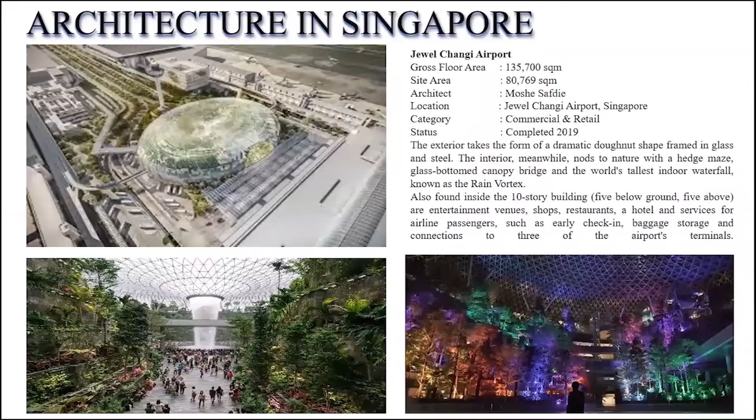This one is completed in 2019. They have airport facilities like baggage, early check-in, storage, and for people who want to go to transit and enter into Singapore, tour Singapore, they can have their baggage areas in the airport. This one actually has a connection with the other three terminals - it's one of the first terminals, connected with the other terminals also.

The second one is Interlace Condo. It's a residential condominium using parametric architecture, designed by Mr. Ole Scheeren. This is a complete residential condominium arranged in 8 different courtyards.

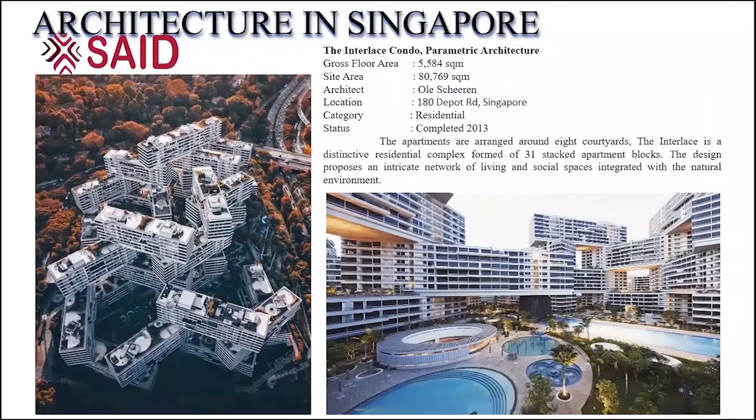The Interlace is distinctive as a residential complex formed from 31 stacked apartments. The design purpose is to create an intricate network of living and social spaces integrated with the natural environment. The parametric design elements together define, encode, and clarify the relationship between the design intent and the design response. This was completed in 2013.

Gardens by the Bay - another iconic building in Singapore, completed in 2012 itself. This is totally a place for tourism and recreation. Gardens by the Bay is full of structures and glass domes, with a beautiful waterfall inside. They have the largest garden in the bay, about 54 hectares, 130 acres.

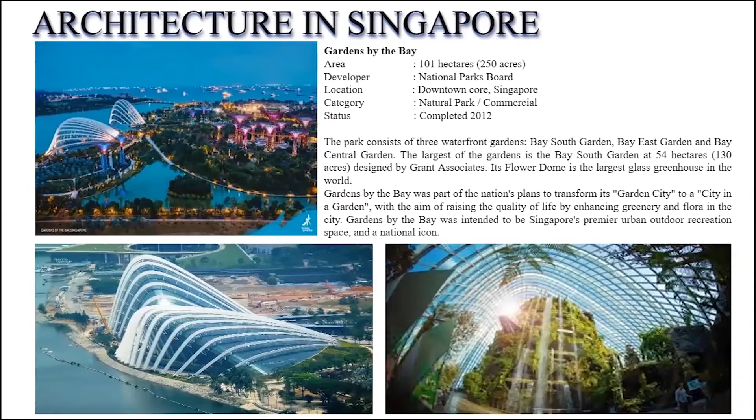It's also called a garden city, or city in the garden. It's full of all kinds of flowers and flower domes and everything over there. It's a beautiful, relaxing, and very interesting place to visit for tourists and also locals.

One of the interesting buildings is Marina Bay Sands. I think everybody would have seen it in the Singapore skyline. This one was completed in 2010. It's a 55-story hotel, and they have casinos, sky parks, roof terrace, and everything. It's a beautiful place to see and enjoy.

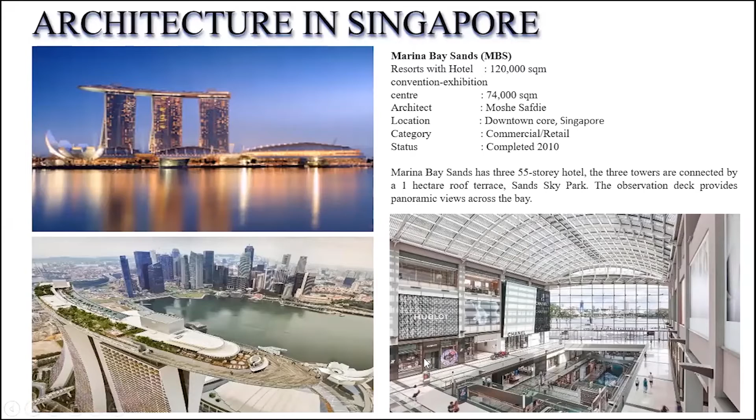Now this one also is like another building - there are two buildings, including the glass facade and also the Marina Bay Tower. You can see the same thing - look here, the same design. You can have replicate designs over here also.

This one has inspiration from sun, wind, and water and everything. You can have a look on that - it's showing that it's like a sail kind of design. This one has 70 stories, and it's one of Singapore's tallest condominiums.

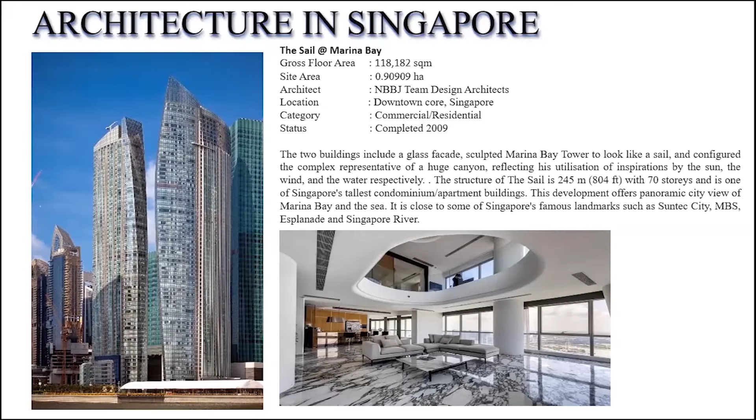So it's apartment buildings, and you have a panoramic view - city view, Marina Bay Sands, and sea view. It's also in the center of Singapore, so you have very easy access to Suntec City, MBS, Marina Bay Sands, Esplanade, and Singapore River.

This is one interesting building. I chose this building because of its winning design. Architects came and competed for the design, and finally this architect got the chance to design this building.

This is purely a commercial and residential building, but it's not something affordable for everybody, unlike other condominium buildings that give that condominium effect to normal people. This was designed by RSP Architects and also ARC Studio Architecture - these firms combined to make this design possible. This building has sky bridges and glass panels, and whatever you name it in a condominium, you have that same kind of facility inside. And they have bay windows, balconies, and everything.

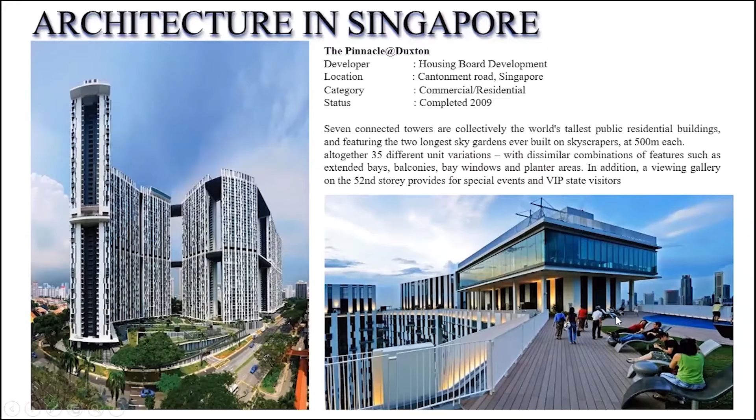So the next one is a government project. The other projects we discussed are all private projects, but this one is a government project.

Next, I would like to start with the Green Mark. Singapore came through this Green Mark scheme, which was launched in 2005, as an initiative by the Singapore construction industry. These are mostly environment-friendly buildings. It is intended to promote sustainability in the built environment and raise environmental awareness among developers, designers, and builders as well. This is mostly applied during the construction period, where they incorporate lots of greenery and also facilitate the reduction of energy.

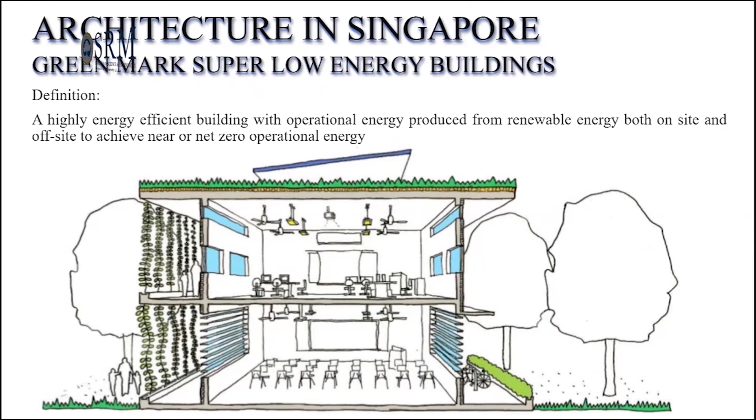So that's why the green mark came in. These are things normally happening worldwide, like fires and the snow melting. So Singapore, regarding climate change and everything, wants to play a good part, so they came up with the green mark. The benefits of having a green mark include reducing energy, water, and material resource usage, so they find ways to reduce all these resources.

They also improve the indoor and outdoor environmental quality. So when you're standing outside, you feel the greenery and everything, so there won't be any direct sun or something that affects your health. Then they have continual improvement for this.

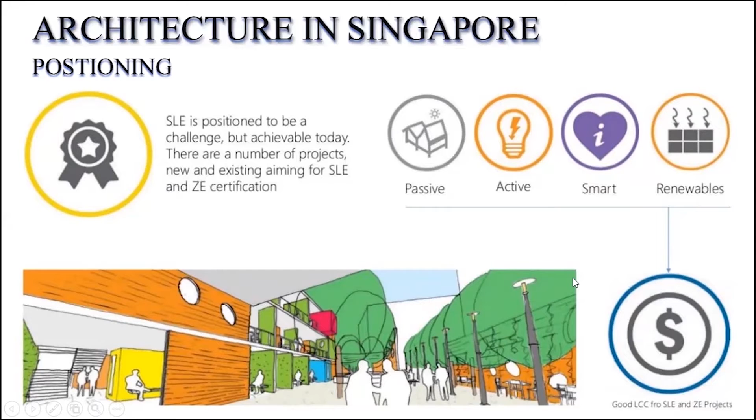So you can see the passive and active, smart and renewable approaches, which is what we are doing now in Singapore's new buildings. For SLE buildings, we have achieved an improvement of about 60% so far.

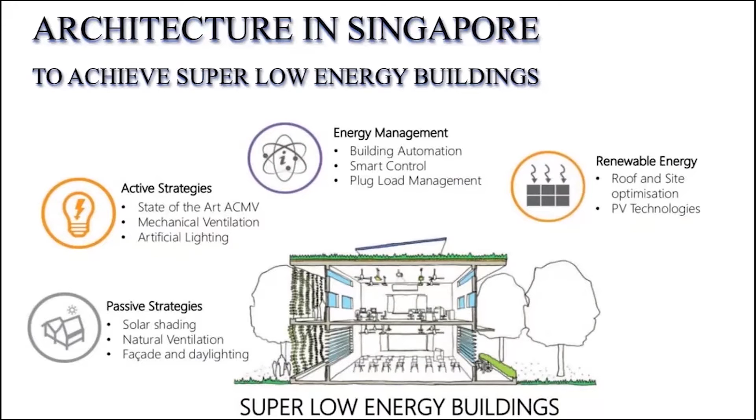So how do we achieve a super low energy building? Active strategies, passive strategies, energy management, how we manage energy, building automation, smart control, plug load management, and we use renewable energy like solar panels and other PV technologies to encourage low energy buildings.

The next one is the Parkroyal Hotel, a commercial building with lots of retail shops. They beautifully incorporated SLE in every sense, you can browse for more information on how they used it. There are lots of open spaces and greeneries, well maintained, incorporated into every building and every room, so you get a greenery feeling throughout.

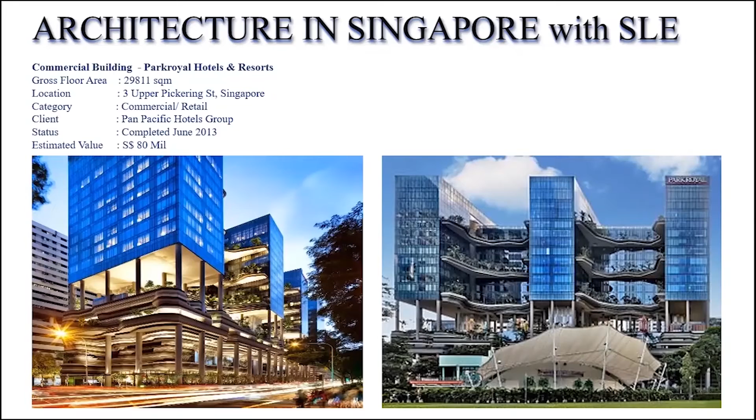They also use every possibility to reduce energy and use natural energy and solar energy. This next one is an upcoming project, also under SLE, and also a government project.

There's a new trend in Singapore now where every building must have commercial and retail, so people don't need to go out to get what they need. They design it so there's a car park, restaurants, hospitals or clinics, and other activities, gyms, walking, natural parks, all in the same area, so you don't need to travel elsewhere for those things.

So they build for healthy living, so people have a walking experience, cycling, and other healthy activities. They incorporate lots of areas for these activities. You can see the spaces in this building and area, used for car parks, gyms, and activity areas like a children's playground, senior citizen activity area, and a normal walking area.

If you want to go jogging, walking or cycling, whatever, you can use these areas. And these two areas are for commercial and retail things.

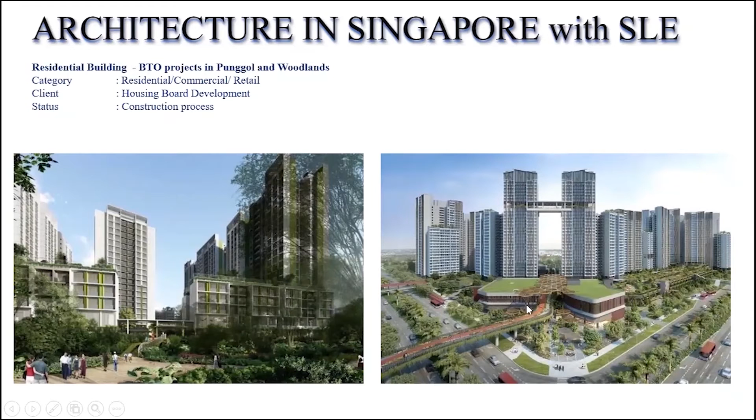I would like to go to the other interesting part, which is a new construction technology in Singapore. We mostly use prefabricated things here, because cast-in-situ is actually very rare in Singapore now. All the new buildings and new construction are mostly prefabricated. The reason they use prefabricated is high efficiency, and they want to reduce manpower on site. Once it's done, they just bring it to the particular site and join to fix it there. So they don't need many people to do the blocks, and they also get better construction quality than the previous HDB housing board buildings.

Now new government buildings everywhere are using this prefabricated method. Singapore is full of apartments because of space constraints, and these apartments, after a while, started having leaking issues and structural issues. This is something that will be avoided when you have these prefabricated construction panels.

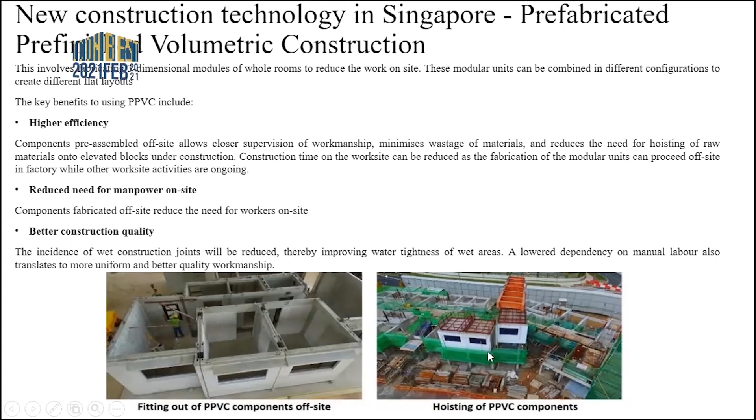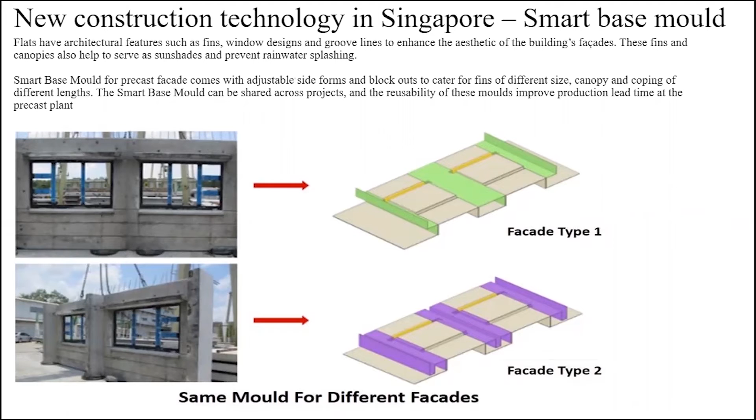So you can see here the panels, how they're fixing it, and how they bring them to the site and fix them. This one is hoisting the PPVC components. This is the same thing, and this is base molding, how they're molding the facades on both sides with the windows and everything, then joining them on site. They have different sizes, so everything is accurate, because it's already dimensioned. The measurements are all perfect.

The next new one is the automated precast production system. I hope everybody saw this in the news. It's actually the first time in Singapore, and I'm working in that contractor. That contractor has this new machine which can design in 3D. They can panel the whole thing in 3D, and it can be completed within minimum hours - they can finish the precast floor panels. So you can see these are the precast floor panels, and the whole building can be completed within one or two days. This is a new thing that came to Singapore.

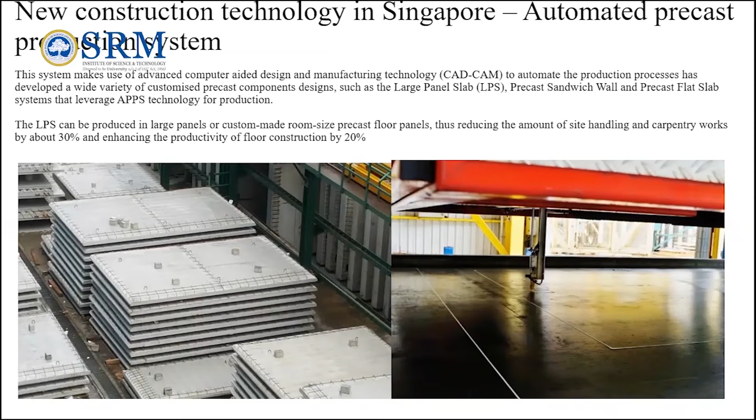The next one is actually my project, which gave me an opportunity to create a ripple in the architecture world. When I come to work as an architect, the design is mostly done combining with other architects and designers. So my colleague and I joined together and did this project.

This project is a Singapore project. It's low rise, something like a duplex house. We completed the design development around this time. It was supposed to start in February 2020, but it's been delayed, so they were mostly going to start this year in March or April. This is normal residential, also like a condo kind of house, but it's not an apartment - it's a duplex house. Whatever facility you name in a condo, the same facility will be inside this building in this development.

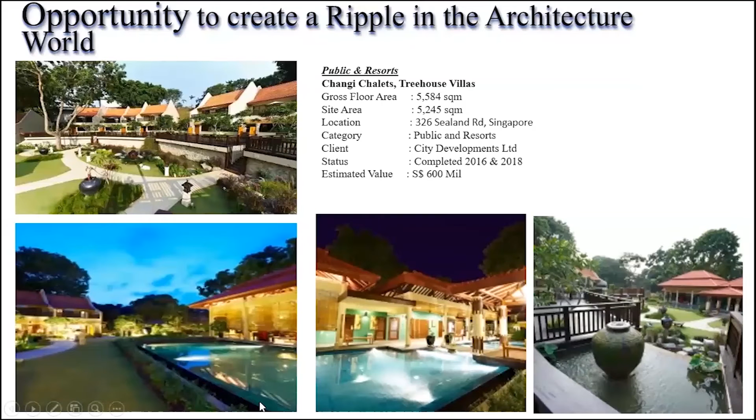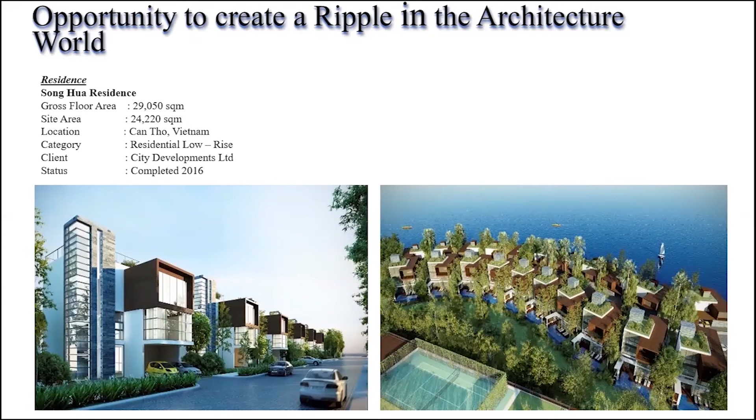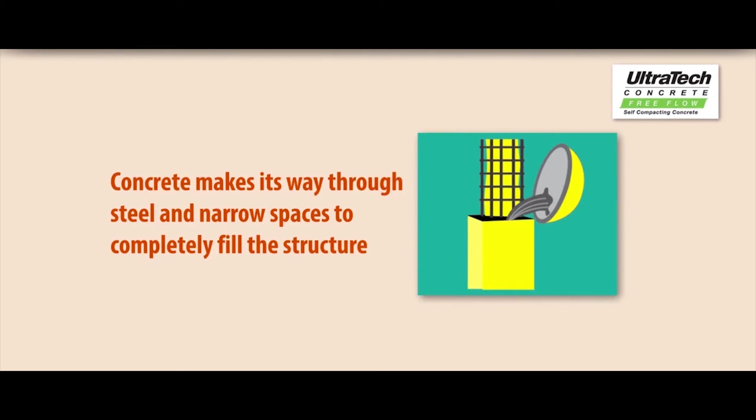Free Flow is a self-compacting concrete. After pouring into the form, this concrete makes its way through steel and narrow spaces to completely fill the structure without any cavities, without any manual labor involvement. UltraTech FreeFlow Plus has been awarded Green Pro certification by the Green Products and Service Council.

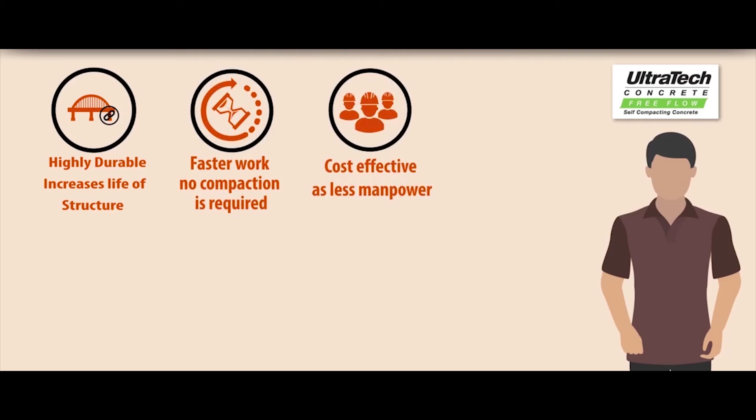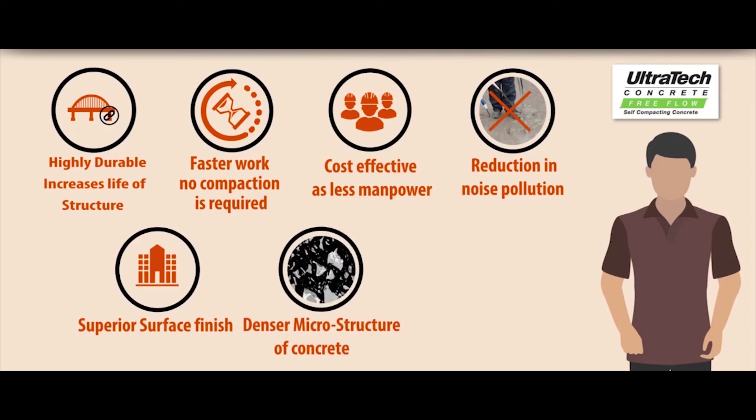Benefits to the end customer: Free Flow is highly durable and increases the life of the structure, as this concrete allows complicated designs without any voids. It's faster work since concrete placement is very fast and no compaction is required. It's cost effective as less manpower is required at site, and it reduces noise pollution since Ultratech Free Flow does not require vibrators. It also saves cost. It gives a superior surface finish due to its unique self-compacting feature, and improved durability due to a denser microstructure of concrete. This concrete has no voids, so there are no leakage problems.

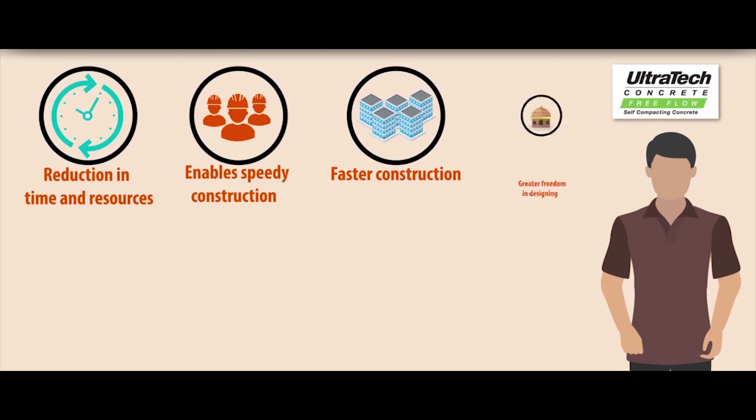Benefits for applicators and technical influencers: reduction in time and resources required for compaction and placement of concrete. It enables speedy construction and reduction in manpower at site, resulting in labor savings. Faster construction allows applicators to take on more projects, with greater freedom in designing complicated, intricate, and elegant structures. It gives a superior surface finish without any blemishes or patchwork, so the contractor has goodwill in the market.

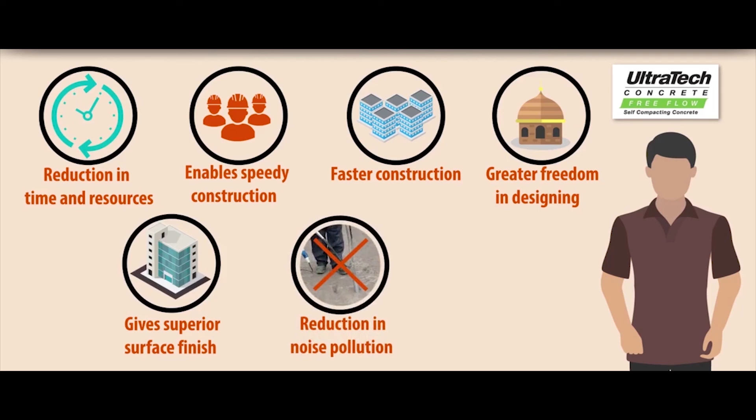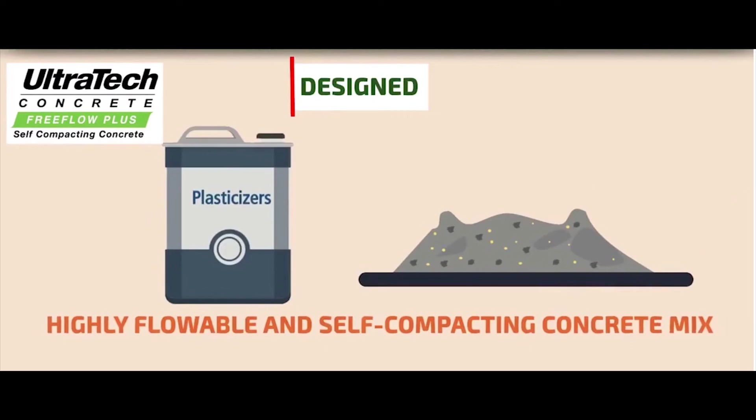Reduction in noise pollution as Ultratech Free Flow does not require vibrators, and it also saves cost. Free Flow Plus is designed using special high-performance plasticizers and viscosity-modifying agents to give a highly flowable and self-compacting concrete mix. It's delivered to sites using 5 to 6 cubic meter transit mixers, and also 12-liter buckets for smaller quantities. On arrival, concrete should be tested for its workability and flowability.

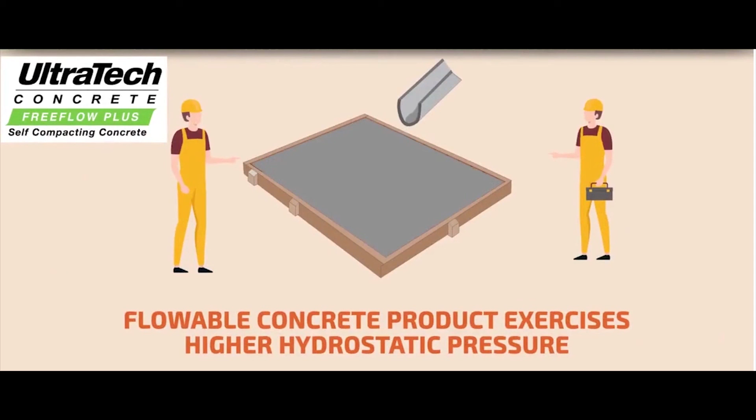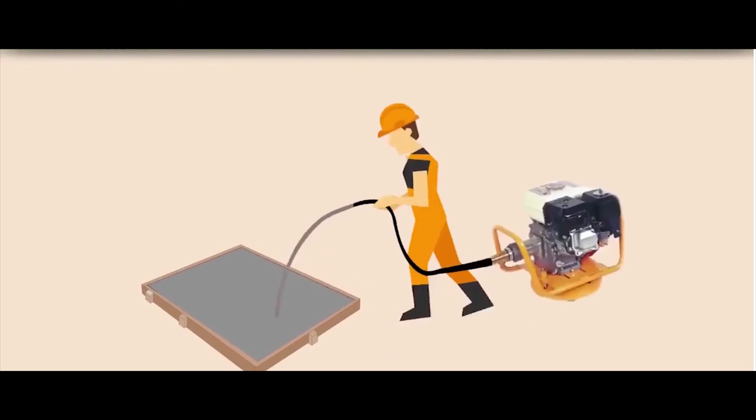Before application, the formwork should be sturdy, leak-proof, and clean from debris. UltraTech FreeFlow Plus, being a flowable concrete product, exercises higher hydrostatic pressure on the formwork. There should be more care in setting up the formwork support to ensure safety at site since it is high pressure. It requires minimum manual effort in spreading and compacting. Normally, UltraTech FreeFlow Plus would not require the use of needle vibrators.